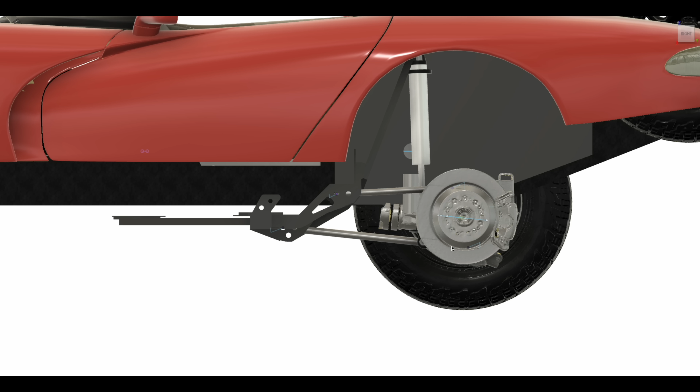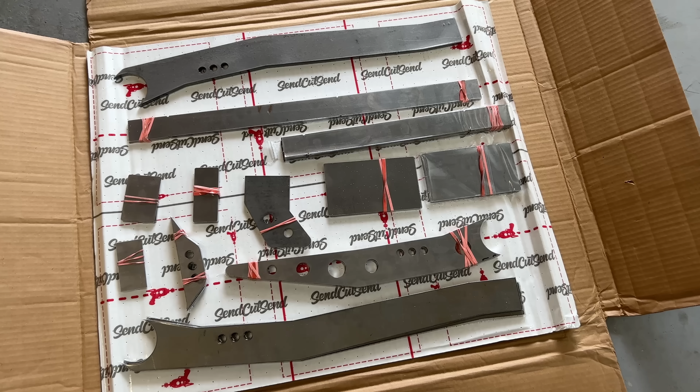When we last left the rear suspension, we had discussed lots of designs and lots of ideas, most of them bad. But now it's time to pick one of these bad ideas and make it happen in the real world. So we will order parts from Send Cut Send, weld them together, change our mind, and order new parts we'll weld together again. We will make links and brackets, and end up with a solid rear axle Dodge Viper, which actually kind of feels more correct than the independent suspension we took out. It takes a truly special engineer to make a Dodge more Dodge than Dodge did.

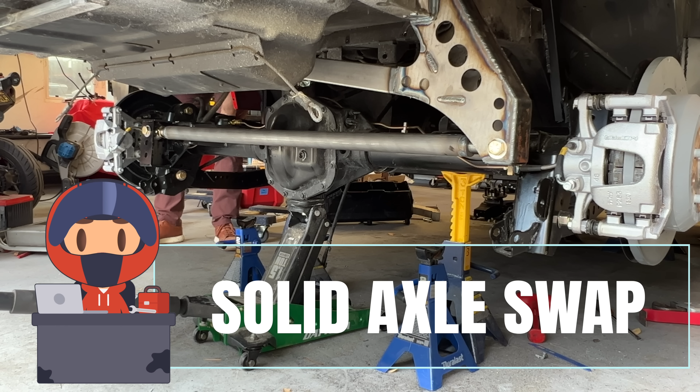We'll start with this, which isn't really part of the suspension, but we need it to make the suspension work, or at least make the drive shaft work with the suspension. We need to lower the back of the transmission and line up the output with the axle.

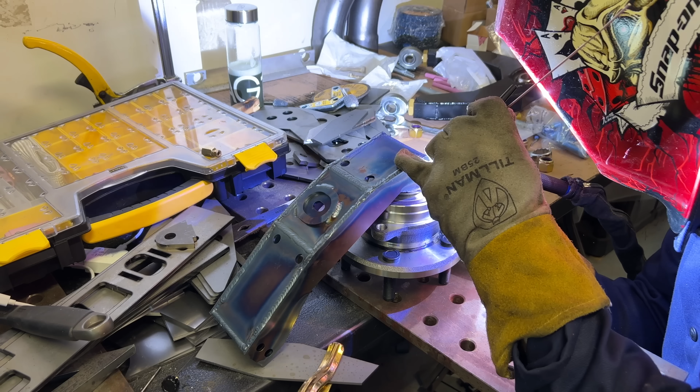I talked about this previously, but basically we need to make a transmission mount. I designed this up a while ago and had it laser cut out. I welded it up and installed it. I also added some reinforcement plates to the frame to make sure it's nicely secured in there.

Partly because it might see a lot of load from rough suspension hits, but also because it's one of the lowest parts of the car now, so it might just smash into a rock on the trail. I should probably also add some protection for the actual transmission. I added some adjustability with holes in the brackets. This is probably unnecessary, but it was super easy and will help if I ever change my mind about ride height. It's currently in the middle and it'll need to be lowered to one of the bottom holes.

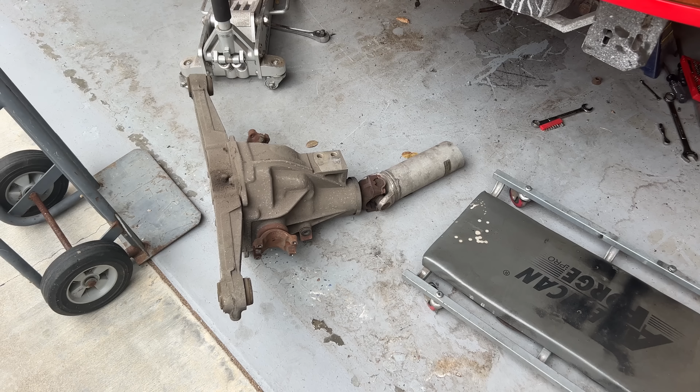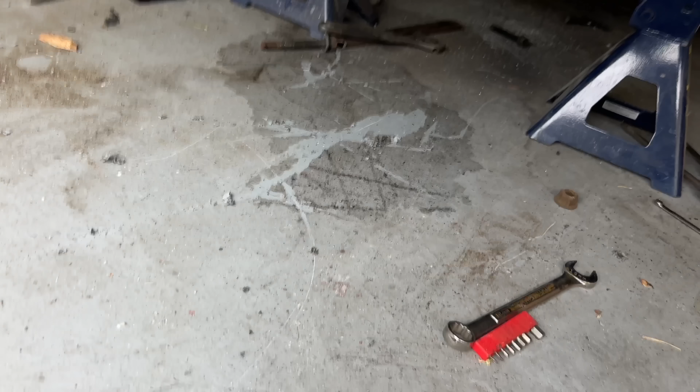Before I dropped the transmission, I had to remove the drive shaft, and I also had to remove the rear differential. The drive shaft comes off by removing the U-joint bolts, but these have tiny weird heads that are mostly rusted in place, so I busted out the problem solver. The problem solver actually solved many problems on this part of the project. Caused a few of them too, but mostly solved.

I used it to cut out the entire rear frame section. I needed this part of it gone to clear the solid axle, but with that part gone, the rear lower part doesn't really have much stiffness and doesn't really do anything. So I just did some weight reduction and cut out the whole thing.

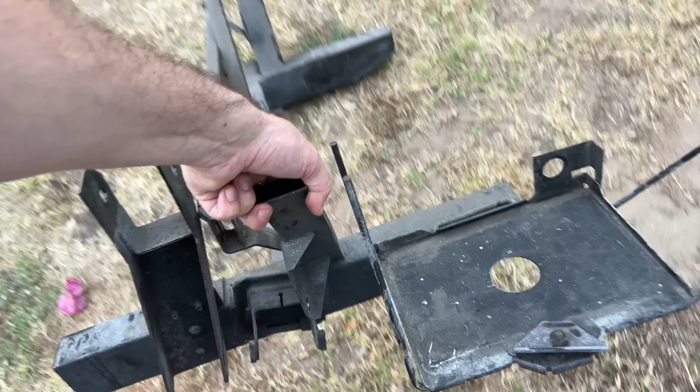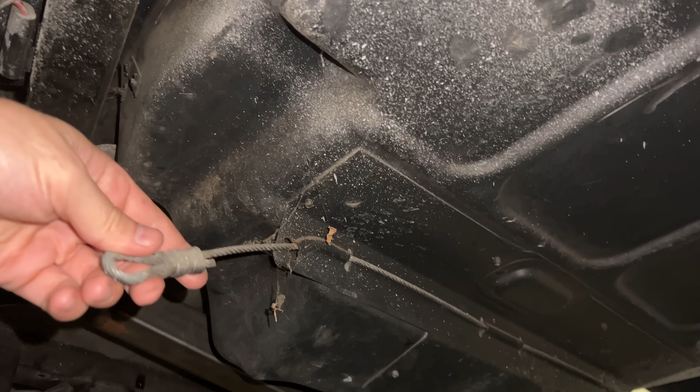The lower rearmost part is used to hold on the rear fascia, which I'm not using anyway, but it did also have this cable bolted on both sides that runs through this plate that's riveted to the trunk floor. Not really sure why this is here, if it's for a crash or somehow a ground cable for the fiberglass trunk. Do I need to attach this to the frame? Somebody find out if I need this.

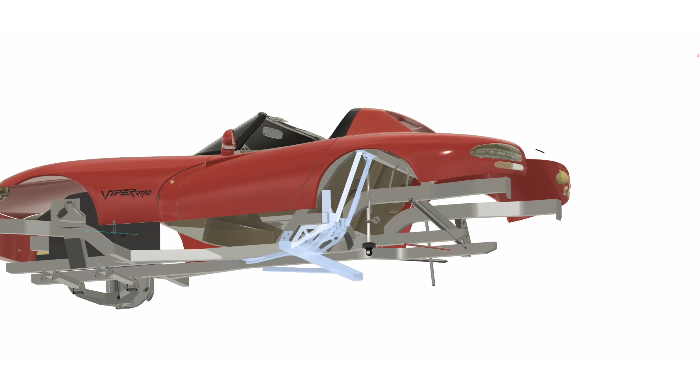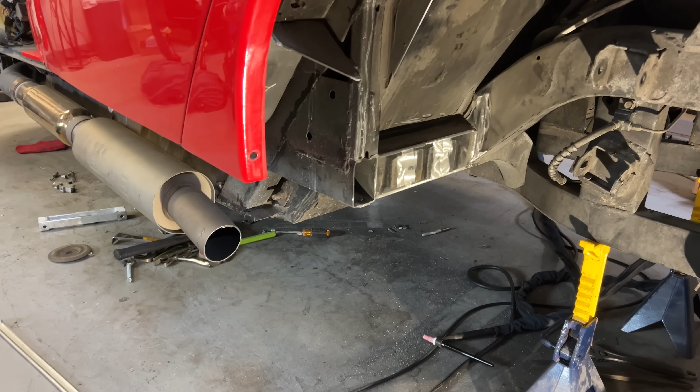With everything out of the way in the rear, it was time to install the new rear suspension brackets. Remember all this extra crap I designed to attach the suspension points to? Well, to attach it to the frame, I had to weld it. And to weld it, I have to continue my least favorite part of car projects, grinding off loads of paint and rust. I started with this piece down here.

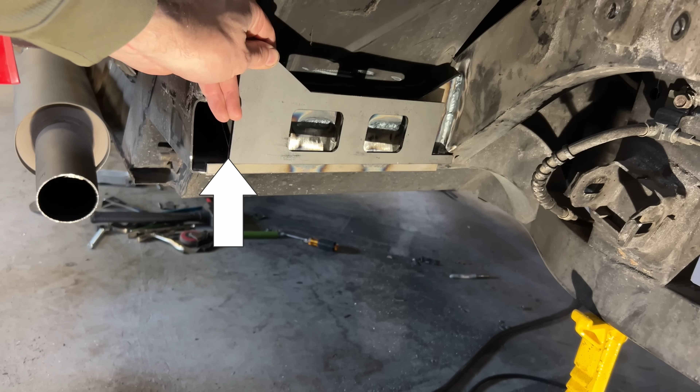It welds to this frame tube and has a lot of load going through it, so it's important that it's welded correctly. I carefully welded it on, making sure it would never come off again, and then I realized I welded it on backward. This little triangle here is supposed to support this outside piece, not up to this frame piece here. Off to an excellent start. You know what? It's probably fine. We'll just mirror the CAD and pretend like that was the plan all along.

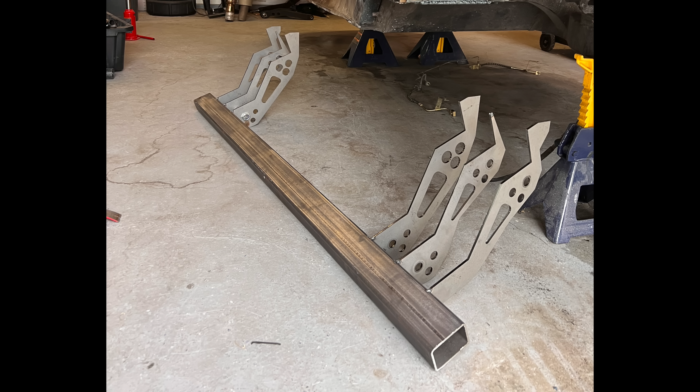Mounting these vertical plates that the rear links attached to was a bit of a challenge. I wasn't sure the best way to get them located, so I tack welded them to the crossbar and lifted the whole thing in. Then I just went to town with a welder. Should have bought a MIG, because this was a lot of TIG welding, and it was pretty tough to get in some spots.

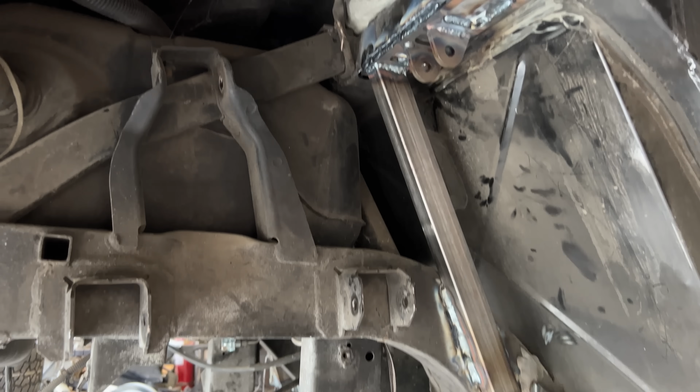If I was a less entertaining YouTuber, I would do a 10-minute time lapse of me grinding, cutting, welding, and swearing, but I'll spare you the wasted time and just tell you that it was a lot of grinding, cutting, welding, and swearing.

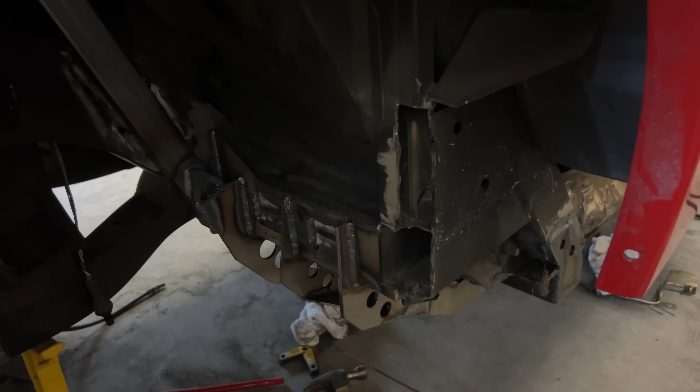Since the wheel arches of the Viper are big to begin with, the new larger tires should fit in there just fine, but I did have to modify the frame in this spot. I cut out this protrusion and welded on a cover plate to clear the tire at full suspension compression. It should be fine everywhere else. We'll find out when I get it all installed, or possibly later in the desert with a flat tire.

I made a few changes to my original design of these mounts. The first one was this bracket that I welded on incorrectly, but we don't need to talk about that anymore. I also removed a couple of pieces that didn't seem like they were doing much, and I added a little bit of reinforcement on the sides of this bar going across. I also added some steel to the back sides of these plates to kind of box them out.

I painted it all with my favorite incredibly dangerous paint. This got most of it, but I will need to go back with a brush and some chassis paint to get in the cracks and crevices.

If I'm honest, I don't love these mounts. I would up the thickness on these guys if I was to do it again, but I might feel different once it's all assembled. Let's find out.

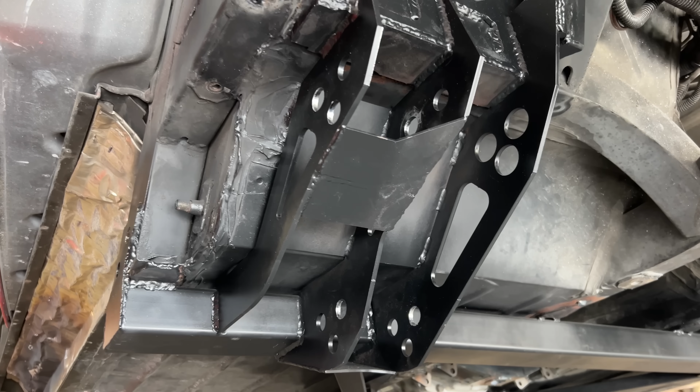I mentioned in the last video that I decided to run the coilovers into the lower link. This is not done on the Jeep that the axle came out of. In fact, it's pretty rarely done in production, but it is popular on off-road builds, so much so that there are lots of companies that sell lower links for pre-runners and desert builds.

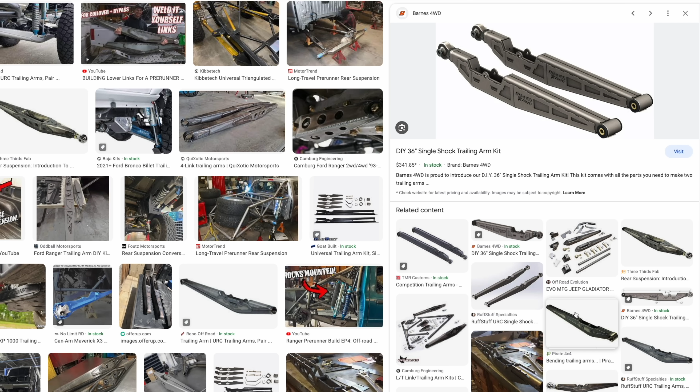They all look cool. I think that's important. It has to look cool, and it has to have your logo on it. All off-road stuff needs logos all over everything all the time.

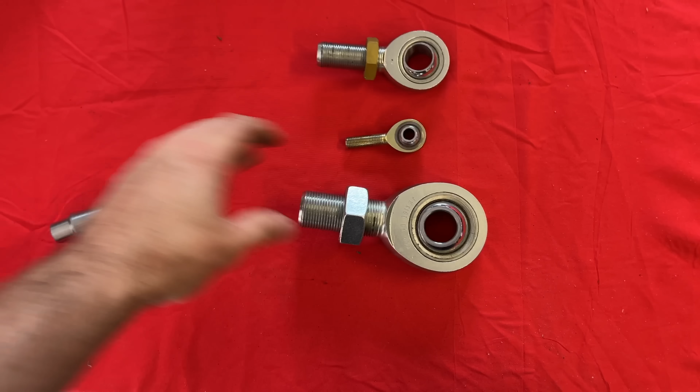I bought some rod ends for the links. I just kind of guessed on how big they should be. Then they arrived, and I realized I guessed wrong. They are way bigger than they need to be.

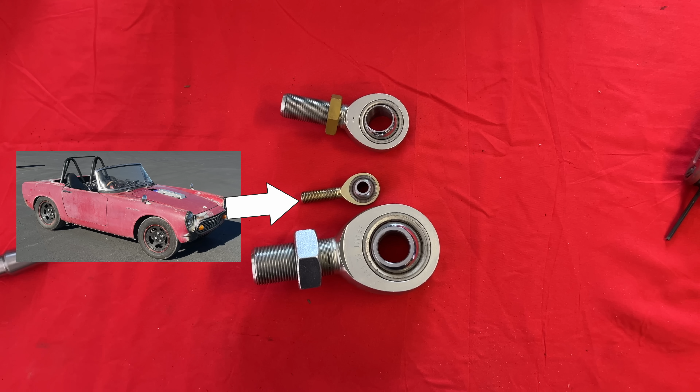I decided to just keep the bigger ones on the lower links. I don't really need this size, but those links might see a lot of weird loads with the coilovers going into them, and they might also bang off of rocks and stuff, so I kept those. But I did go to smaller ones on the top links. To give you a sense of scale, this one is the size I'm using on the suspension of my Honda.

With a fat rod end on the front and a fat spherical in the back, I just needed to connect these two with some metal and also have a place for the coilover to sit. It's kinked down like this for 3 reasons.

One is to get the bottom of the shock where I need it to be. The other is to make sure the spring perch clears the lower link at full compression and rebound. And the third reason is that it puts the coilover mounting just below the axis between the two ends, so the spring pushing down always keeps the lower link oriented the correct way.

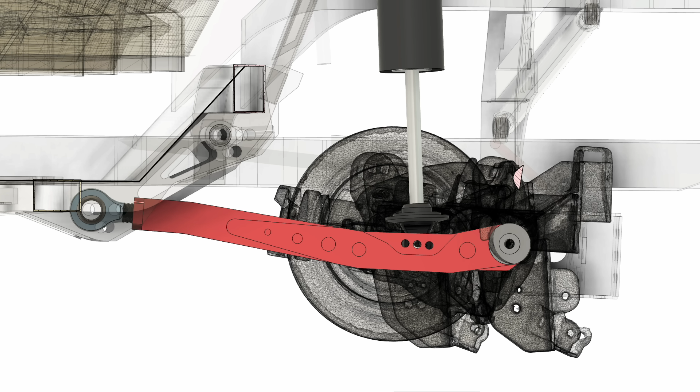The shocks need a 1.5 inch width for mounting, so I just ran a couple of 3/16 inch plates at that width the whole length and welded those up to the spherical cup and the threaded boss for the rod end. I boxed out the top and bottom, and then I layered up some extra metal on the outside, kind of where the coilover mounts.

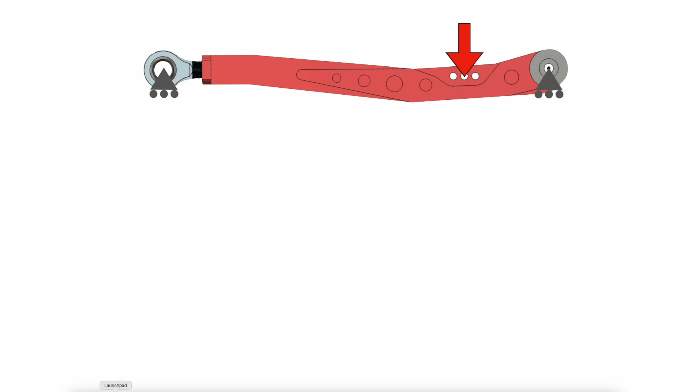You can look at a simple free body diagram and see that the highest stress will be around here-ish, so I threw some extra metal at that area and called it a day.

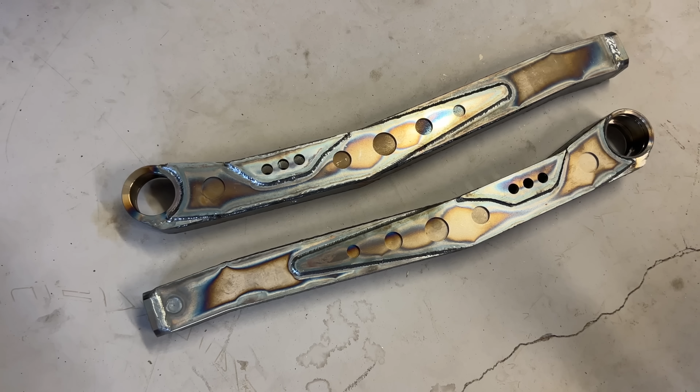I added 3 possible mounting locations for the shocks, but I think I'm just going to use the rear one. I'm pretty happy with how these turned out. They look great, a lot less expensive than buying, and exactly what I needed.

Except I forgot the logo. All good trailing links need a branded logo. Unfortunately, this one doesn't really lend itself to a laser cut pattern.

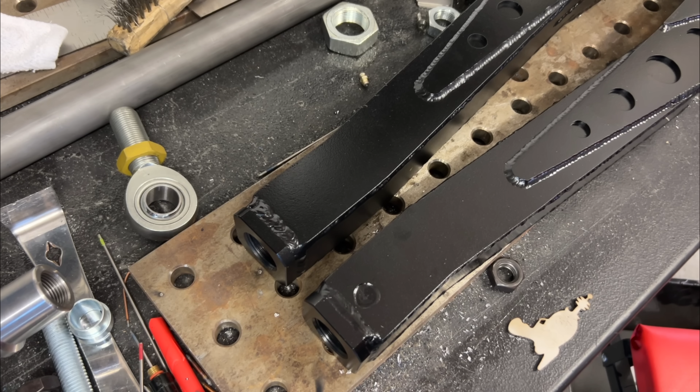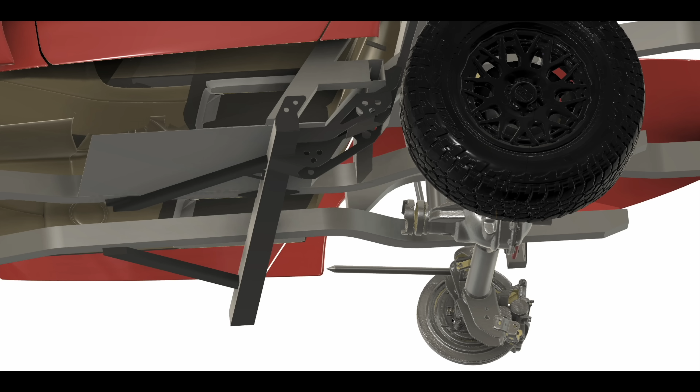About this time, I decided to move my rear axle back 2 inches. I'd already moved it back 1 inch, but decided to go another inch. I did this partly for extra length for the drive shaft, which is real short, but also because at full compression the axle swings forward a little, and I want the wheel right in the wheel arch at full compression.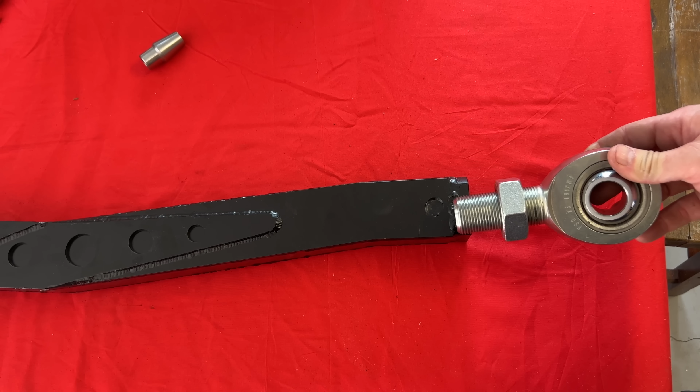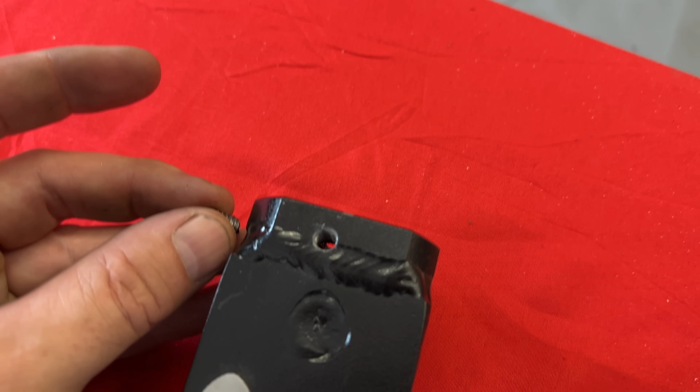Unfortunately, I'd already made the lower links, and the threaded rod doesn't have enough extra thread to extend another inch. Fortunately, I added extra holes in the suspension mounting. Unfortunately, they're too far apart. Fortunately, I can thread the rod end in all the way and make it work with the rear hole. Unfortunately, I can't fit the jam nut on there anymore. Fortunately, I can drill and tap the side to fit a set screw to keep it from rotating.

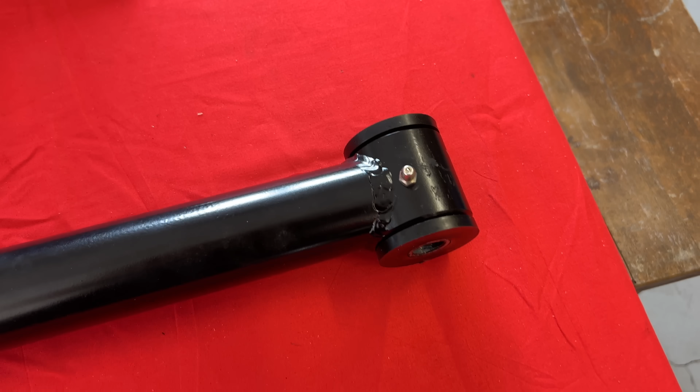Problem solved. The upper links are much easier - just hollow tubes with a rod end threaded in one side and a poly bushing on the other. I added the bushing back here for some compliance in the rear. These links aren't exactly parallel, so the system is slightly constrained from moving side to side. The Panhard Bar does move it a little side to side too, so I need some compliance somewhere, and this seemed like a good place.

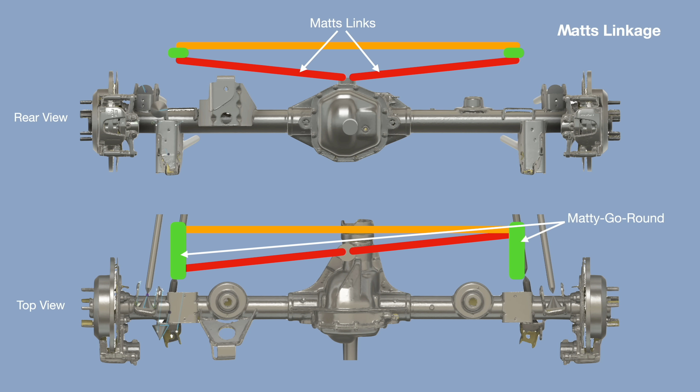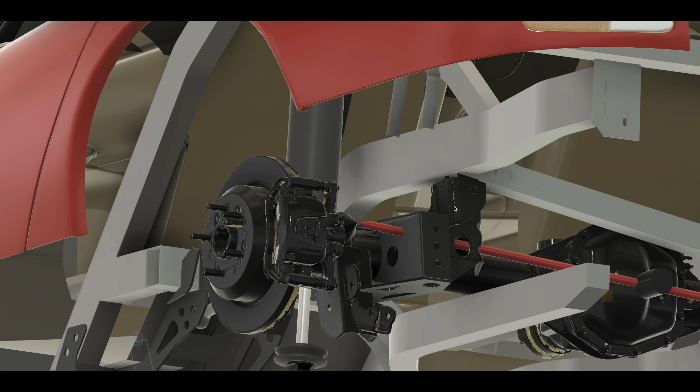I know some of you are disappointed that I decided against my overly complicated Matts Linkage with the Matty-Go-Rounds and the Panhard Bar. I do like things that are weird and different, but this off-road Viper is weird and different enough on its own, so I went with the good old-fashioned Panhard Bar. It's been working for a century, so it's slightly more proven than some bullcrap I came up with a few weeks ago.

The rear axle I'm using is from a Jeep Rubicon, but the Panhard mount on the axle massively interferes with the Viper frame under compression. I can lower the axle side mount, but I'd have to lower the body side mount too, which isn't ideal.

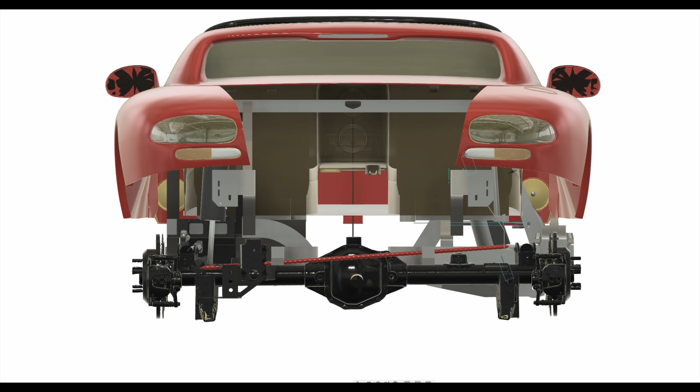The drawback of using the Panhard Bar on this car was always that there's no frame structure down here where I need the body side of the bar to mount to. There was, before I sawzalled it all into oblivion, but since I had to cut out this section anyway, it wouldn't have been very well constrained.

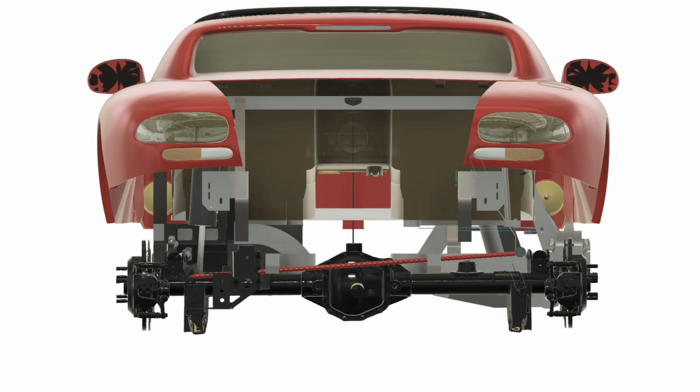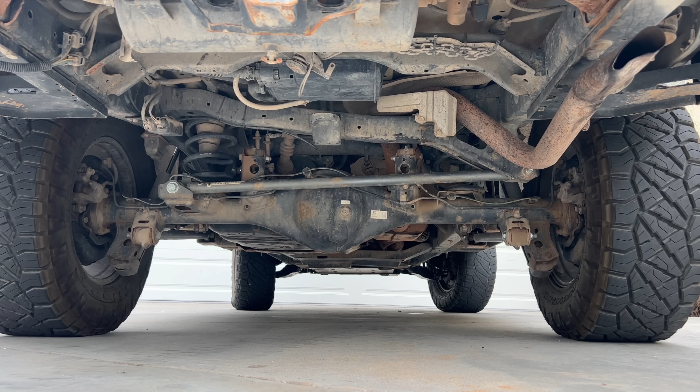The problem is I need a mount dropping way down to pick up the body side of the bar. To get any stiffness, I need to run some structure to the other side of the frame as well, and it's all just a lot of material hanging down all droopy-whoopy. So I looked at how some other vehicles did it and found they all just have structures hanging down. This is just how it's done. So I just did it.

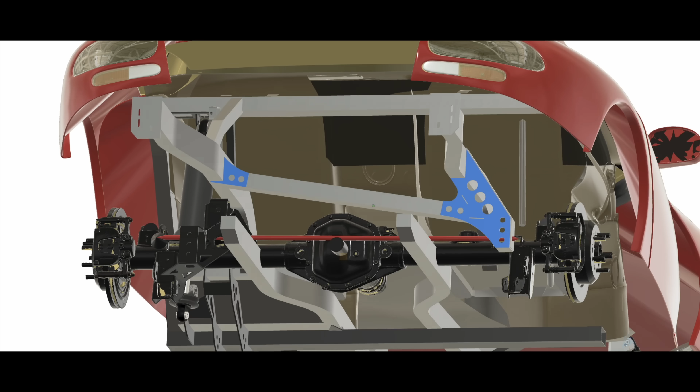I started to get creative with the laser cutting, making it all fancy because why not? But then I decided to just buy a tube since that was easier and probably better.

As for the axle, I chopped off that weird growth on the top and designed my own axle side mount. I added 3 mounting holes for some adjustability in here because apparently that's just what I'm doing all the time now.

This puts my Panhard Bar lower than it was on the Jeep this axle came off of, but it's closer to the 4Runner and pretty close to where the Bronco has their bar. I mostly just copied the Bronco suspension geometry for everything else, so this seems fitting.

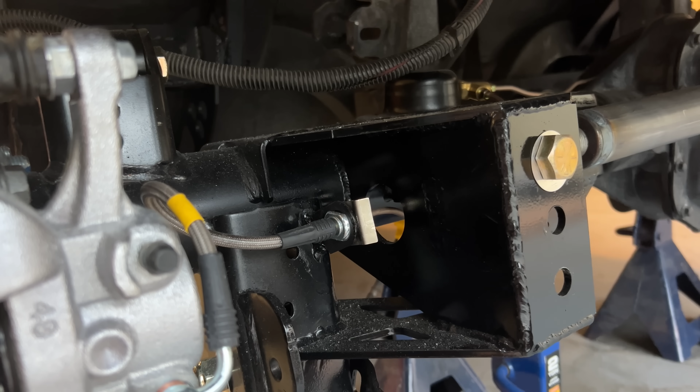I welded it all up, again wishing I had a MIG welder, but it did turn out really nice. This is all looking so good. As for the Panhard Bar itself, it comes with an unnecessary rant.

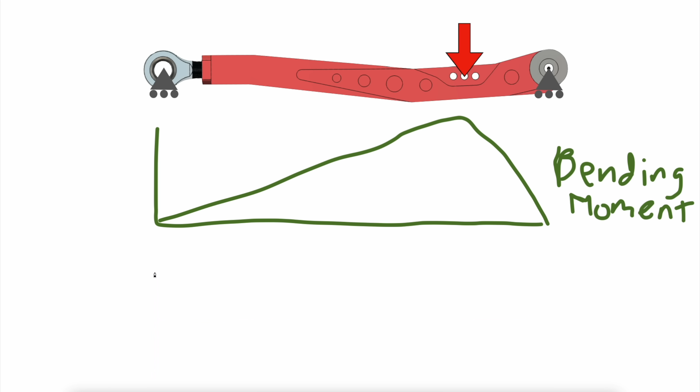Some of you have noticed that I've done almost no actual engineering on this. Like those lower links where I said the stress probably looks something like this, I just threw some metal in there and called it a day. That's not really engineering, and yet it's still more engineering than most aftermarket off-road companies have ever done.

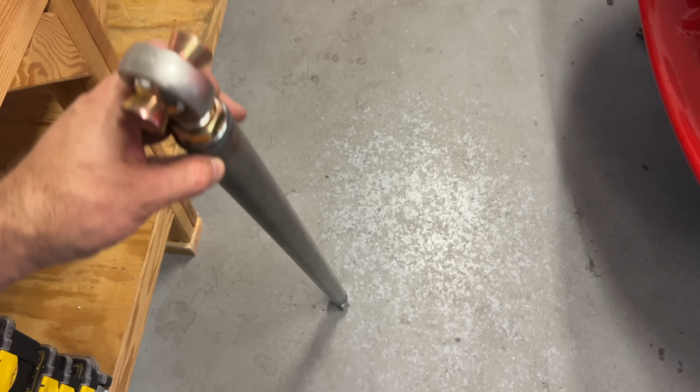Take the Panhard Bar, for instance. It's a pretty simple design - a tube with threaded bosses welded into the ends and rod ends threaded in. Super simple engineering too. It's either going to fail in buckling, like my tie rod did a few weeks ago, or in tension, as in ripping apart.

Tension calculation is super easy. You just measure the cross-sectional area of the tube and then multiply that by the yield strength of the material. Buckling is a little more complicated. You have to use equations with curly, funny-looking symbols, but it's still pretty easy.

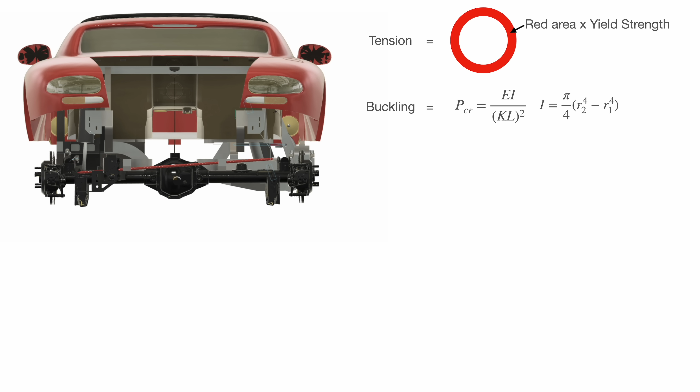I'm not sure how strong this thing needs to be. If it was a track car, it'd be pretty straightforward - we could calculate the load in it by just looking at cornering forces and adding a safety factor. Off-road, it's a little more difficult because the loads are kind of weird and random.

Aftermarket off-road companies solve this problem by just throwing obscene amounts of mass at every part. Most of these guys are using 3/8 inch wall or bigger on their track bars, like this one on my 4Runner. It's 1.25 inch diameter with a 3/8 wall, which gives it a strength in tension of about 70,000 pounds.

That would be over 10 times more than you need for that track car we just talked about. And you do see those weird high loads off-road, but here's the thing - the same bar will buckle at just 20,000 pounds. So it's over 3 times stronger in one direction than the other.

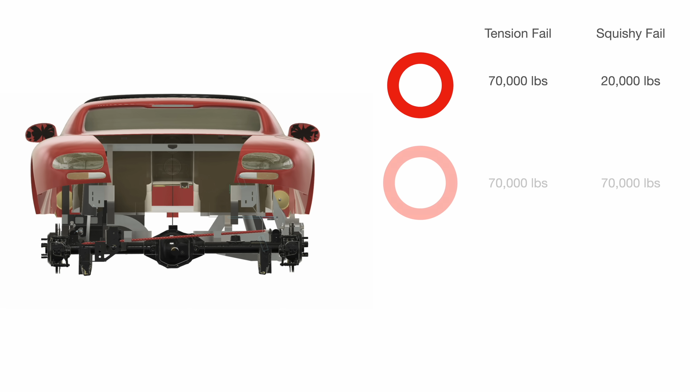Moreover, if they just increased the outside diameter a tiny bit but kept the same wall thickness, then the buckling strength could be increased to the same 70,000 pounds.

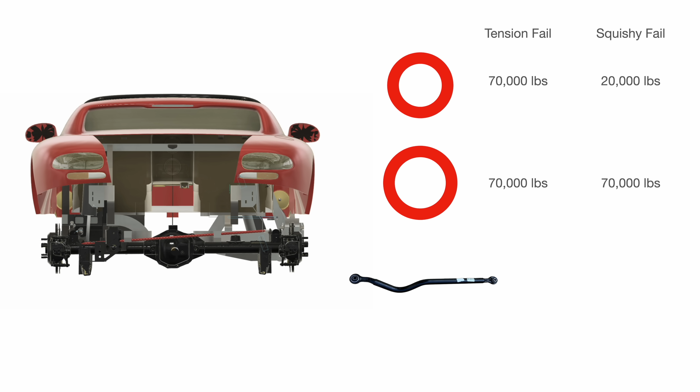I still think this is way too much. 20,000 is probably also too much. I didn't cut open the bar that came with the Jeep that this axle came out of, but it comes from the factory with a bend in it, so I'm guessing its buckling strength is probably half of that.

There are sometimes reasons to use heavier wall material on off-road vehicles, especially on parts low down that might be banging off of rocks and stuff, but if you're slamming your track bar on rocks, it's probably because you just ejected your axle out of the back of your car.

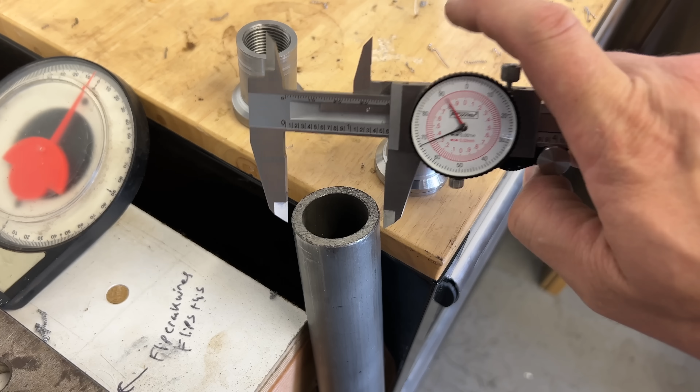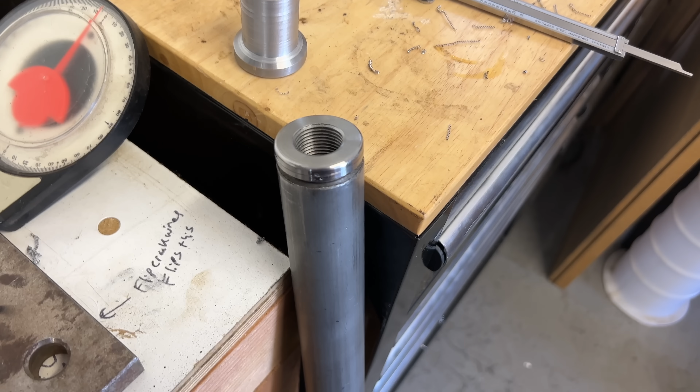So with a tiny amount of actual engineering, I designed my bar to be a slightly larger 1.5 inch diameter with a wall thickness of 1/8 of an inch. I'm also using mild steel. This puts my yield strength at about the same as my buckling strength, both about 20,000 pounds, but it weighs half as much and costs much less than the one in my 4Runner.

But then I remembered all the times I was wrong and how it might be arrogant to assume that I'm smarter than every aftermarket off-road company, so I bumped up the wall thickness to 3/16. Also, I'm not doing any engineering on this part it attaches to, or this part, or any of this stuff. So I'm basically like a C+ student criticizing kids who didn't even bother to go to class.

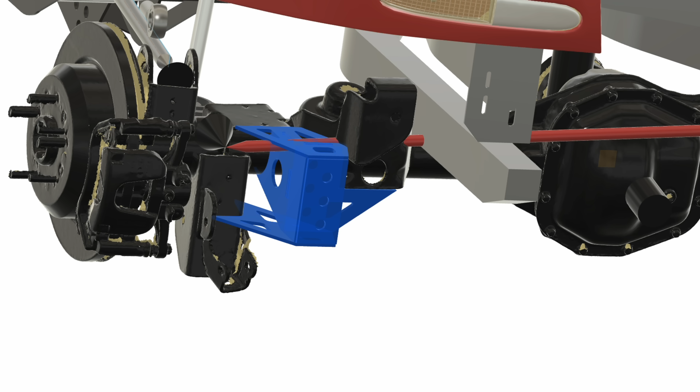So let's just get back to building stuff all willy-nilly.

With the links done, I bolted them into the axle and slid it under the car to assemble it all together in one amazing Mopar monstrosity. Mopar-strosity. Too bad I can't fit that on a license plate.

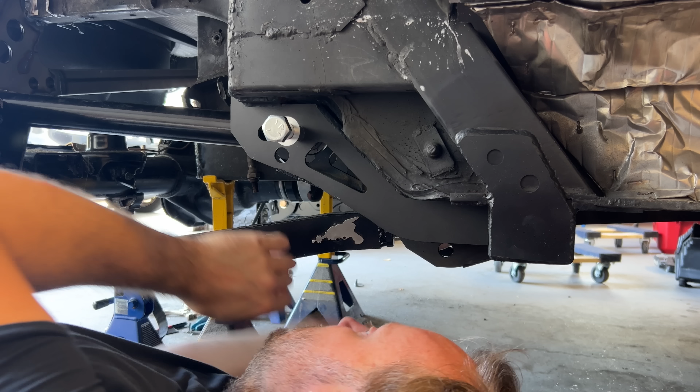The body side needed spacers to fit the rod ends in the right place, but I waited until everything was in roughly the right location before I measured and made those. I was a little worried that the welded brackets might have been off-center slightly, so I made sure the axle was centered in the body and then measured where the rod ends landed between those brackets. They were pretty much dead center, so that was nice.

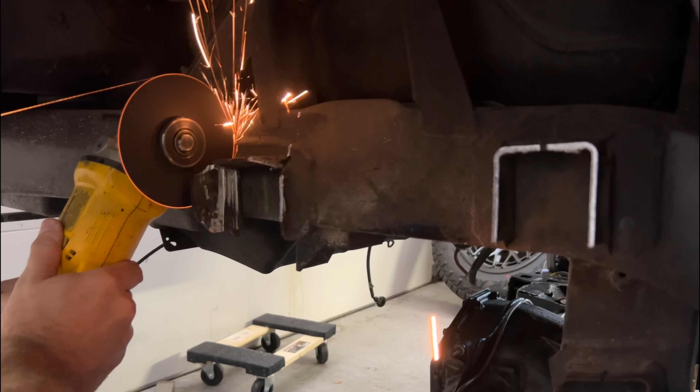With the axle in roughly the right place, it was time to install the body side Panhard mount. To do this, I first needed to cut away a bunch more brackets - the return of the problem solver. There were a bunch of brackets here that were not in my CAD model, mostly because I didn't bother to CAD model any of them. At least 80% of this project is cutting away brackets and welding in new brackets.

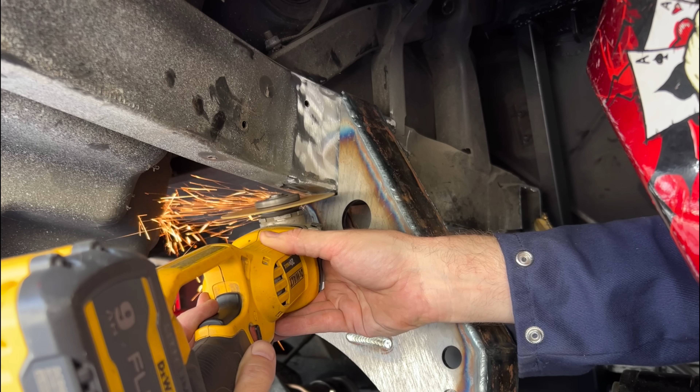I placed the body side Panhard mount and tacked it in, making sure it was lined up with the axle side Panhard mount. Then I continued to remove the remnants of brackets that were not adequately removed the first time.

I'm getting to that point where it would have been easier to just design an entirely new frame for the Viper. I clamped in the bar that attaches the Panhard mount to the other side of the frame and welded that in. I actually like how this looks.

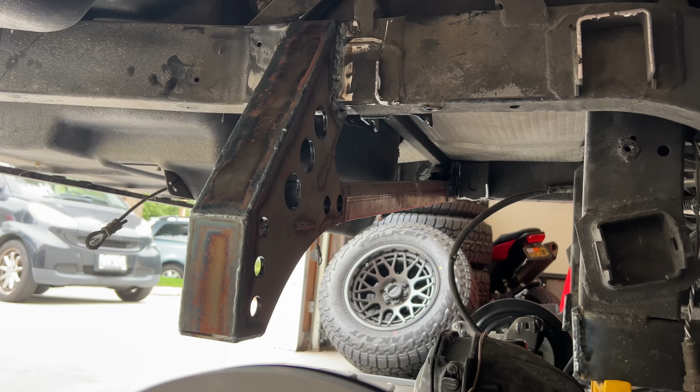I thought it might be flimsy looking, but it looks substantial, a lot better than I thought it would. As for the bar itself, that was a more complicated install than I was expecting.

See, I closed off these mounts where they're just pockets with one opening, so I couldn't slide the bar in. I tried screwing the rod ends all the way in, but that didn't work. I had to drop the axle down and try again.

It took some hammering to get this in there, obviously by using the correct tool and not just whatever wrench I had lying around. In the process, I realized I had these holes out here laser cut too large. They're too big for the bolts, so I'll need to weld on some plates that reduce their size.

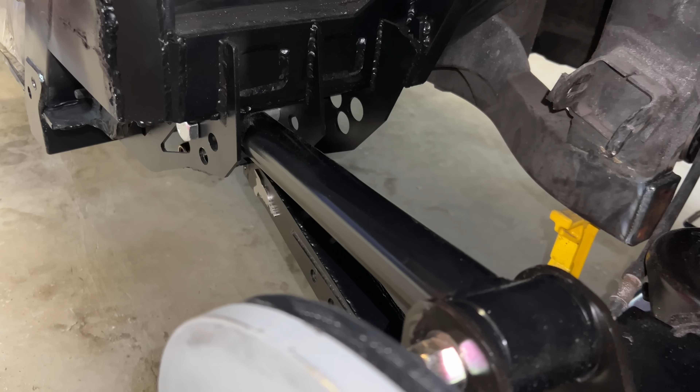With the bar in and everything else installed except the shocks, I decided to swing it through its travel to make sure everything worked. And it didn't. Not even close. The upper link interferes with the mount, like a lot.

I know it seems like I'm just kind of dumb and didn't consider this possible interference before putting this all together, but what actually happened is that I'm kind of dumb and didn't even consider this possible interference. Really, I just didn't draw the upper link. I just kind of had these spindly looking kinematic things.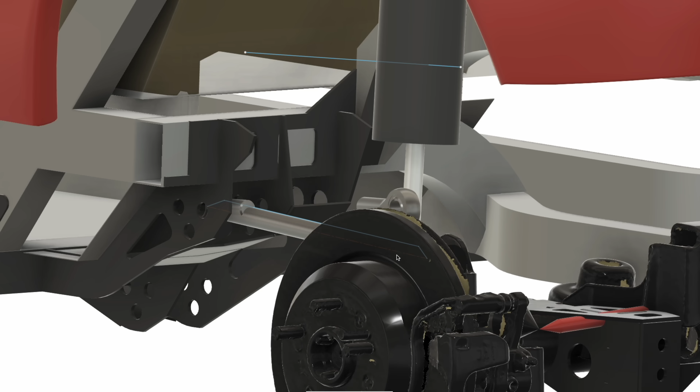I'm not good with details, but I am good with a Sawzall and a welder, and in the end, that's really all that matters. I might just move it to the lower hole here. I'll have to remove that jam nut and add a set screw like I did on the lower link, but that is tomorrow's problem.

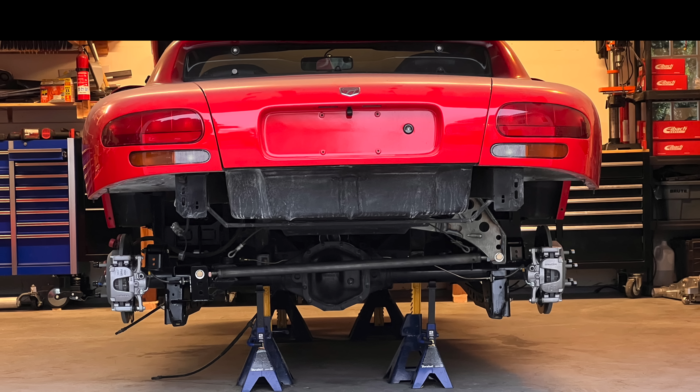I was hoping this would be a rolling chassis video where I have the suspension done and the car rolling on its own, but I have so much left to do. All the big stuff is there, but there are lots of little things left to do.

I need to modify the frame up front to make sure the coilovers will fit. I gotta modify the actual shocks. Need to grind some metal off the lower control arms. I need to make new spring perches.

I kind of want to get the brakes finished because when a car can roll, it's good to be able to stop it from rolling. Lots of stuff needs paint, a bunch of other stuff here and there, but it is surprisingly close to rolling. Actually pretty close to driving, or at least pretty close to making lots of new mistakes, and a lot of new solutions.

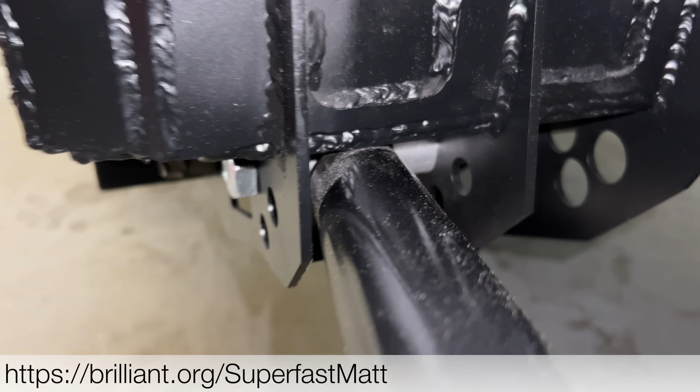I don't always get away with winging it. I do sometimes, but not because I'm lucky. It's because I've crammed my brain full of math, science, and engineering, and while I've forgotten most of it, I do sometimes stir the pot of knowledge by going over things I learned back in the previous century. It's there, but it takes some stoking to remember.